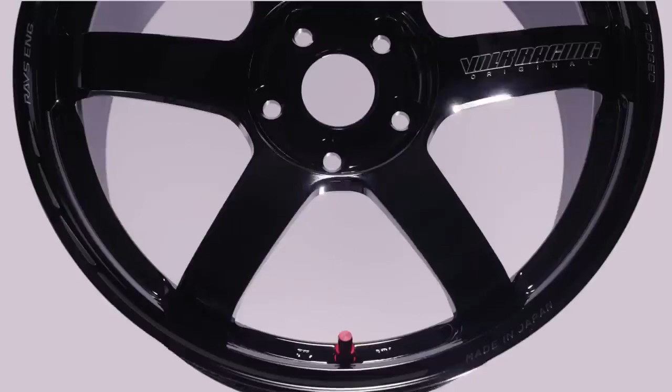World-class Rays forged wheels. The culmination of Rays Engineering's advanced technology and expertise. Taking advantage of the strength and lightness obtainable through forging. Original manufacturing methods and select materials lead to the pinnacle of forged wheels. Combining materials and technology to create the ultimate in aluminum wheels. Let's see how these forged wheels are made.

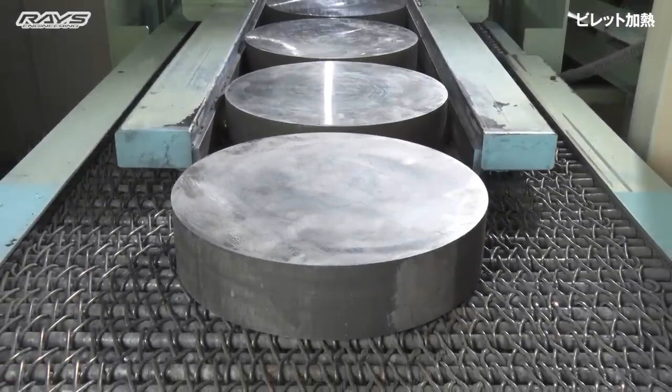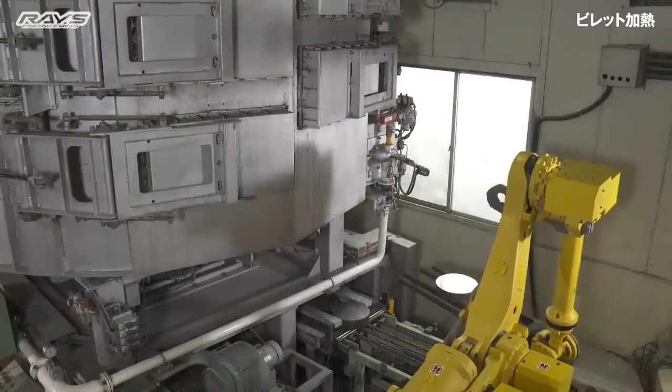The manufacture of forged wheels begins with the selection of the best possible material. Based on the aluminum 6061 alloy, these billets are comprised of our original premium blend aluminum alloy, developed with an emphasis on strength. Prior to forging, the billets are first heated to over 500 degrees Celsius to enable the material to be shaped into various innovative designs.

Using the heated billet material, we finally move on to the modeling forging process. TE37 Saga wheels are shaped using mold form forging dies in 3 stages. In the first forging, the billet material is made into a pancake shape with a diameter close to that of the finished wheel. The forging press applies several thousand tons of pressure, approximately 5 tons per square centimeter.

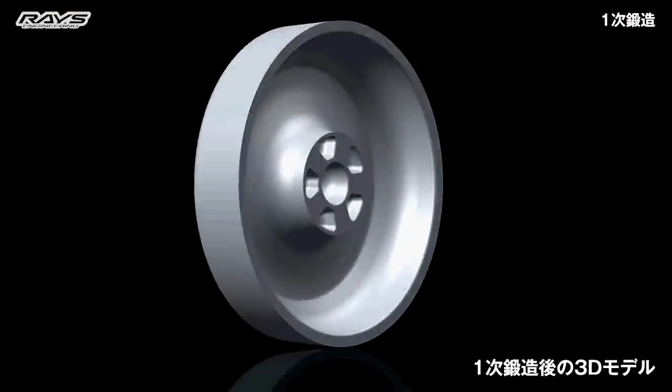From the second forging, a step-by-step mold forging from the pancake shape is performed. To achieve lightweight spokes, the cross-sectional shape is formed by forging from the backside. As you can see from the 3D model, the center of the spokes is hollowed out.

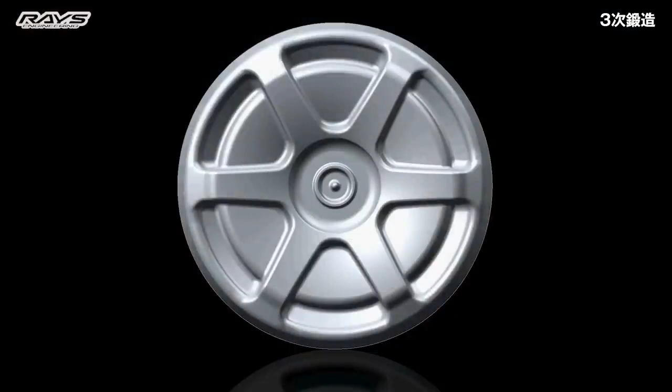Next is the third and final stage of shape forging. Together with the wheel design's overall shape, the hollowed-out portions formed in the second forging are transformed into U-shaped cross-sections, characteristic of thin-walled forging. Lightweight is the aim of this final stage, and a seamless grain flow is achieved through this unique die forging method to obtain the desired design, strength, and rigidity.

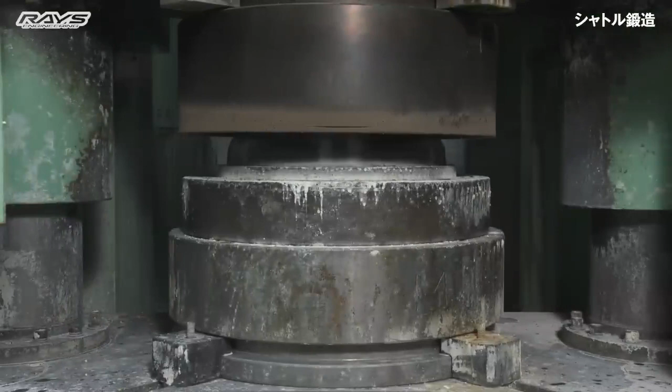This die forging method employs Rays Engineering's proprietary shuttle-type die forging system. Rays Engineering developed a shuttle forging press machine that slides the forging die sets from 3 directions to perform the first, second, and third forgings. This forging press can apply a forging pressure of up to 10,000 tons.

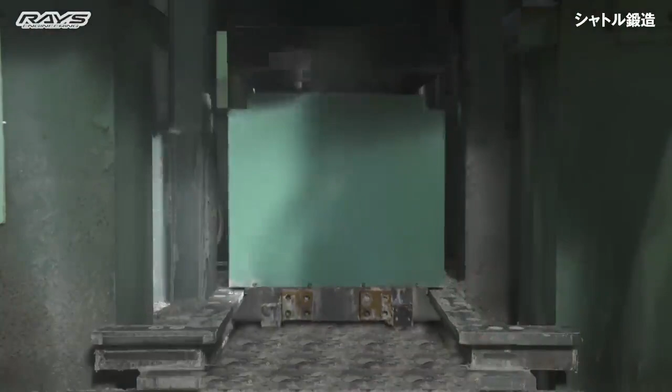The key to maximizing forging performance is the forging die's design. In the 3-stage forging used to transform the billet material into a wheel shape, the wheel's design side and reverse side are integrally shaped by 3-dimensional shaping using the die forging method to form high-strength, high-rigidity, U-shaped cross-sections for the spokes. Rays Engineering's designers combine expertise, creativity, and a thorough understanding of the materials and manufacturing equipment with leading-edge forging technology.

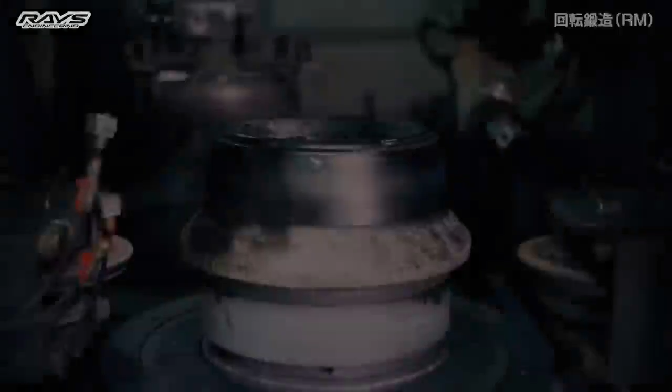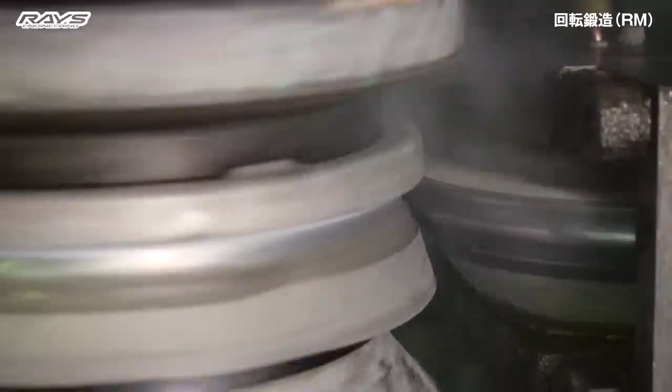This RM forging machine is also our original technology. In addition to forming the final detailed shape, it uses proprietary dies to simultaneously form the outer rim and the flaring of the inner rim. Similar to the mold form forging process, the material is heated, and the heated wheel is rotated as the roller flares the inner rim.

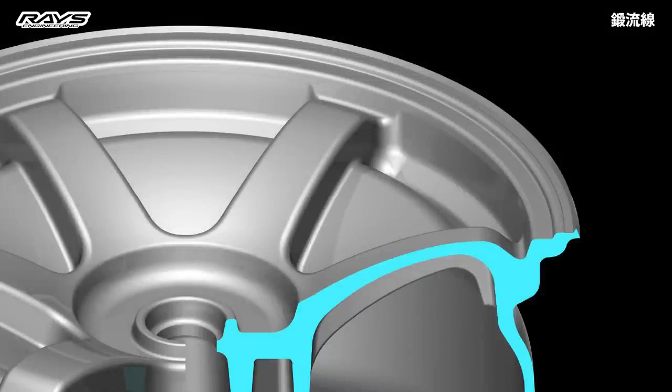When metal is heated and compressed, such as in forging, fiber-like lines called grain flow appear. No machining is used to form Rays wheels, only the mold form forging made possible with our unique die forging method, guided by the experience and knowledge of our design engineers. As a result, the grain flow lines fan out from the center of the wheel in a distinctive pattern, like the fibers of bamboo.

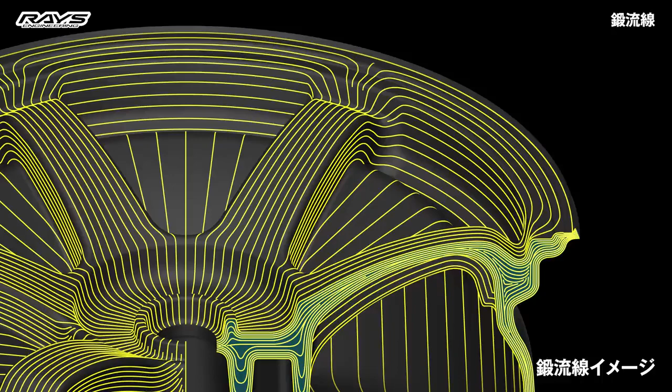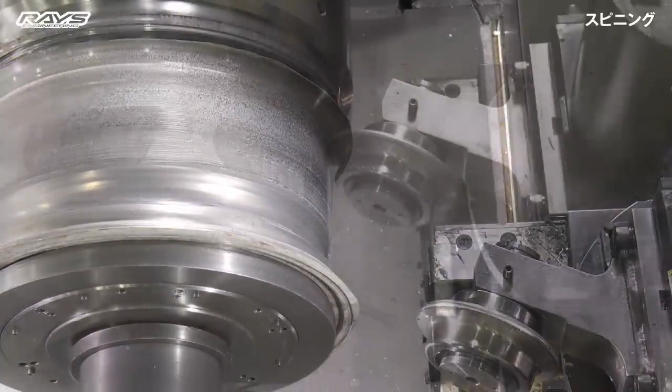This spinning process forms the inner rim's final shape. Inner rim molding from 5J to 13J is possible with a flexible mold, by taking advantage of the elongation characteristic of the uniquely compounded aluminum alloy.

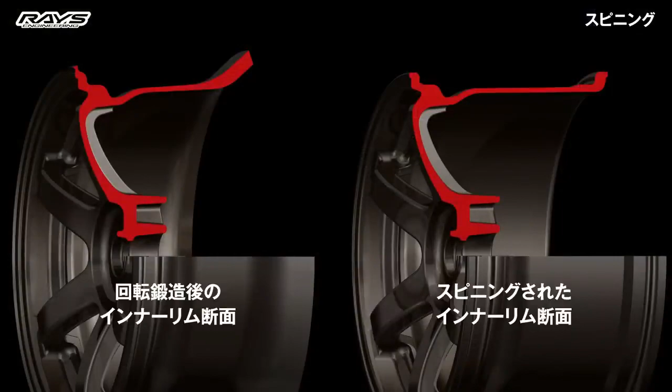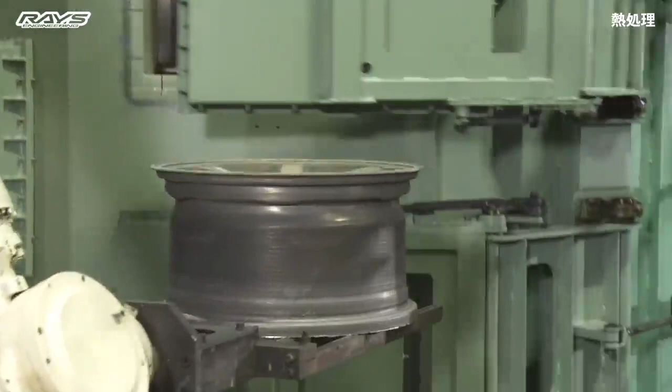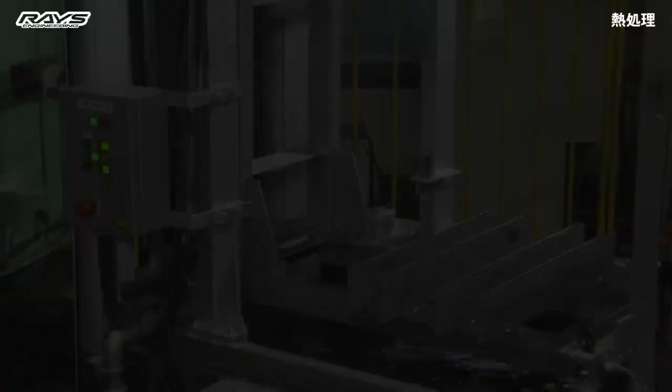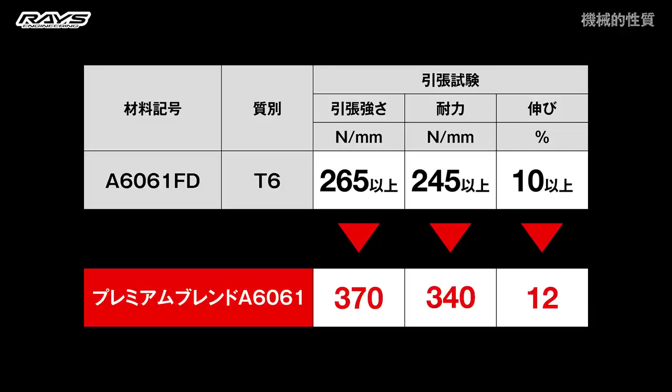Following forging and rim forming, the aluminum alloy is heat treated in order to maximize its unique properties. The heat treatment process consists of quenching and tempering. This heat treatment process is precision controlled to maximize the aluminum alloy's three key mechanical properties of tensile strength, proof stress, and elongation. As a result, even with a lightweight, thin-walled rim, good steering stability and suspension stiffness are maintained during cornering.

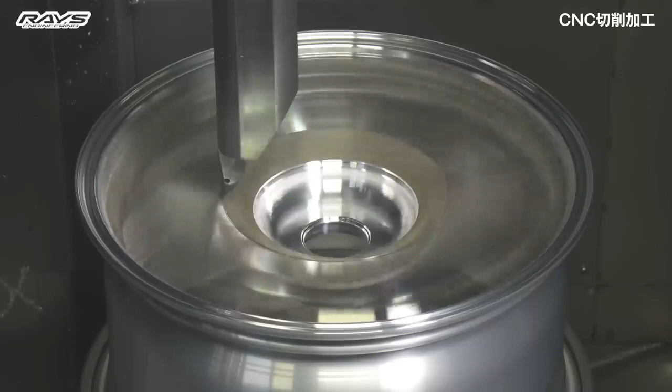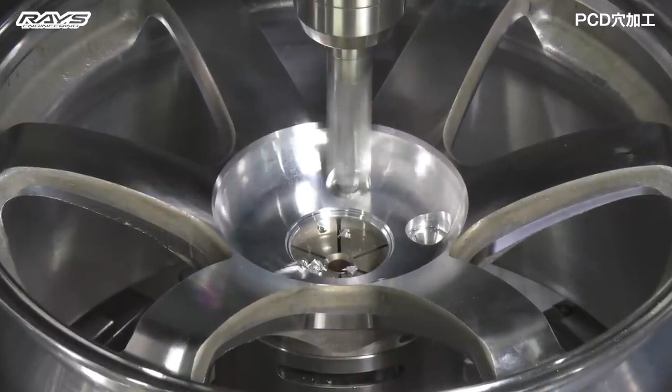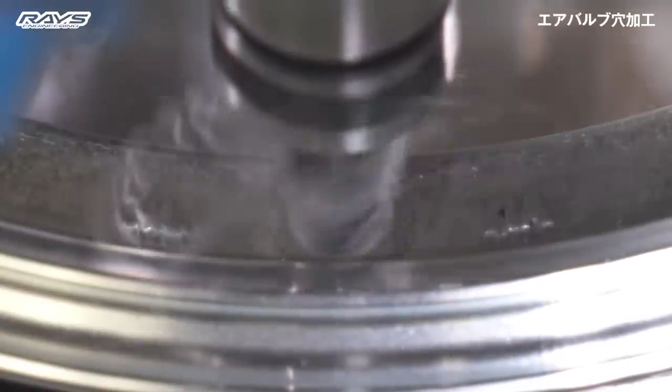The material of the forged wheel, which has undergone heat treatment, undergoes machining processing in advance of the tire inflation and vehicle attachment processes. In two processes, both the outside and inside of the wheel are machined to achieve a precise balance within 1/1000th of a millimeter, an essential factor. PCD drilling is another process that requires high precision, since the balance of the wheel's mounting points on the vehicle is a critical factor. The air valve hole is also drilled parallel to the well angle of the wheel.

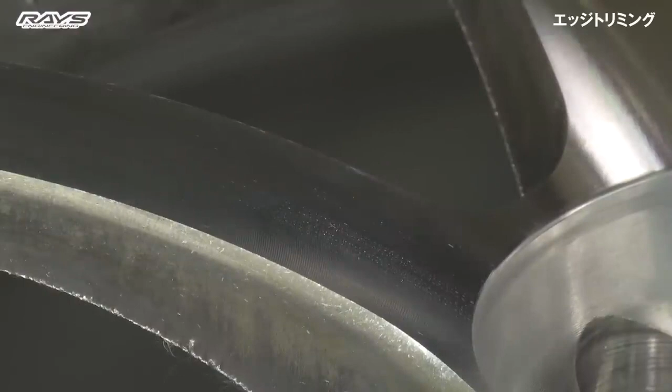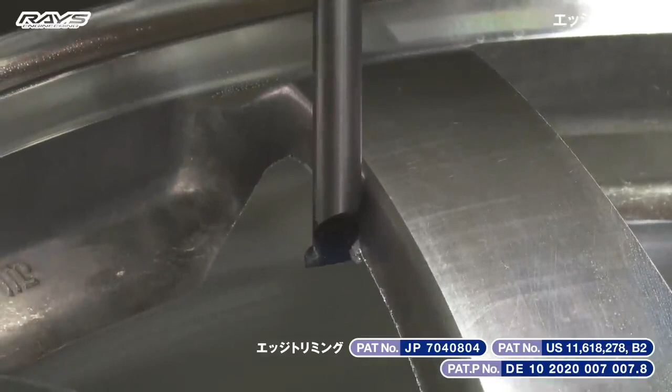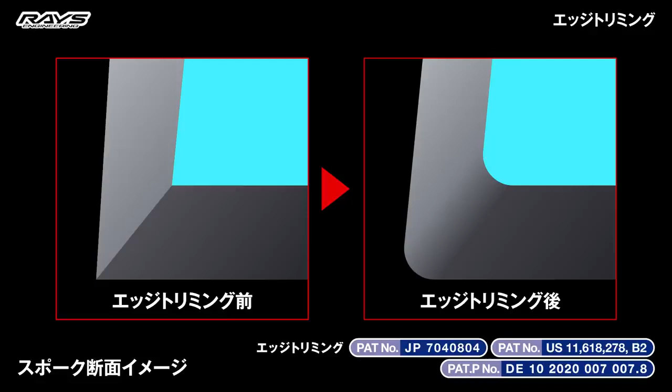Burrs remaining from machining on the spoke edges can reduce corrosion resistance after painting. To prevent this, Rays Engineering developed a method using a special tool that rounds the spoke edges on the rear side of the wheel during the machining process. This edge trimming ensures better adhesion of the coating film that's formed in the painting process, improving corrosion resistance for the wheels, which are subjected to corrosive conditions due to their proximity to the road surface. This edge trimming method is a patented Rays Engineering technology.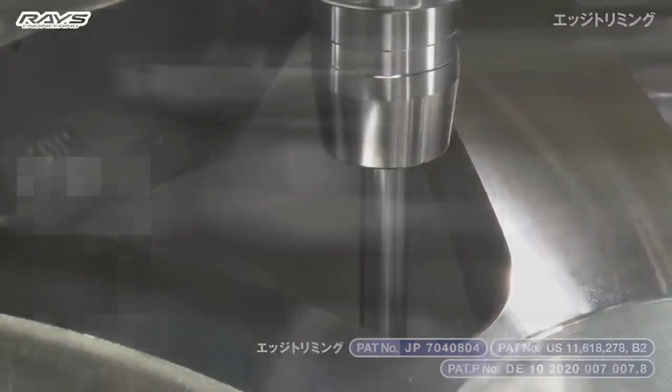Knurling is a process that improves wheel performance on race cars and other high horsepower vehicles. It helps prevent slipping between the tire and the wheel that might occur due to repeated sudden acceleration and deceleration.

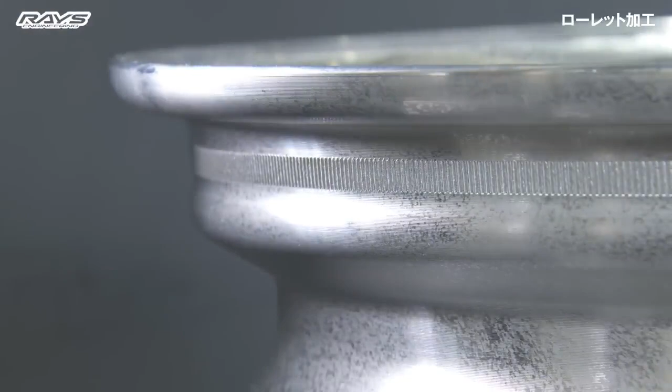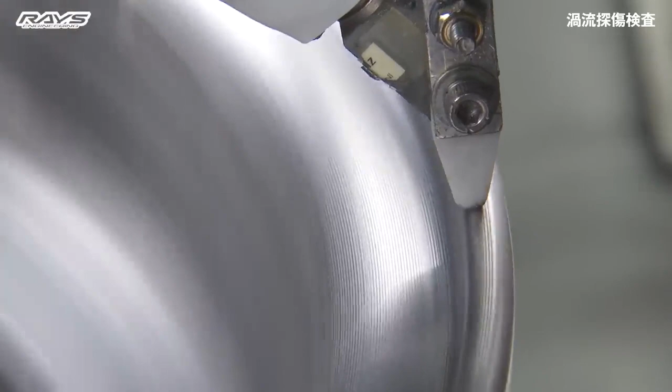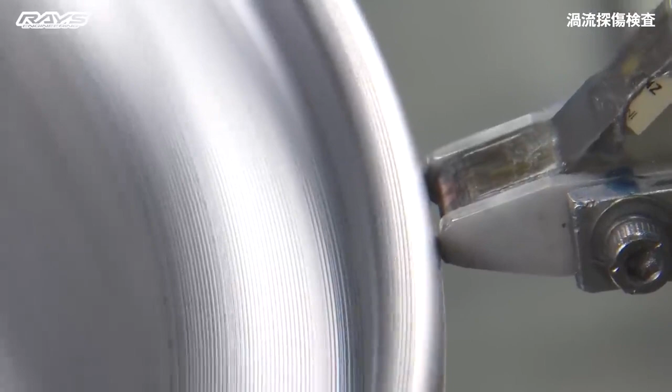Eddy current testing is used to inspect for hairline cracks invisible to the naked eye. In particular, the camber force that is repeatedly exerted on the inner rim edges during driving can cause cracks to appear in the rim if there are any internal defects, leading to a loss of driving performance that could potentially pose a serious risk. Considering possible worst-case scenarios, each wheel is methodically inspected for defects.

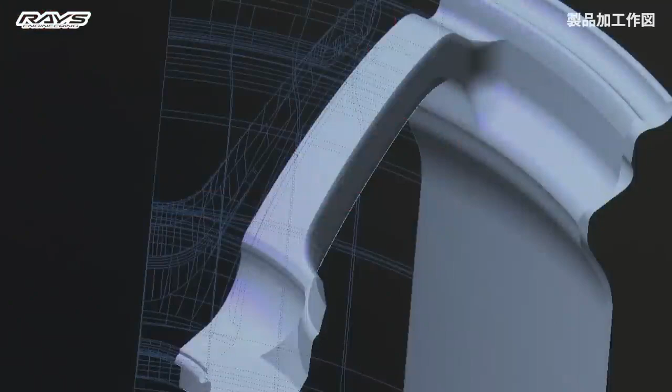Wheel strength, rigidity, and balance are essential to ensure safe, comfortable driving. All three factors are numerically verified right from the design stage. Here as well, our designers' knowledge and experience are a solid foundation for design plans to create ideal wheels that are strong, lightweight, and beautiful. Proven designs are the basis for Rays Engineering's wheel manufacturing.

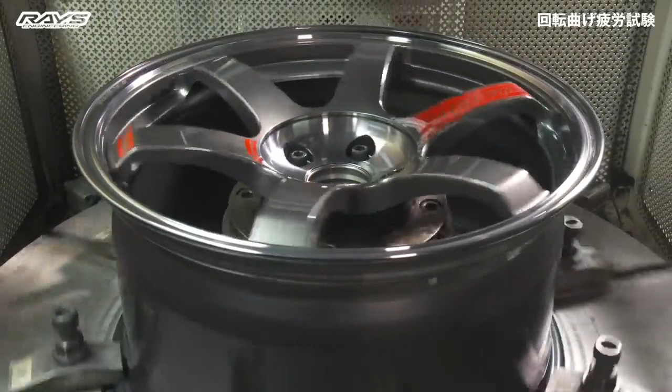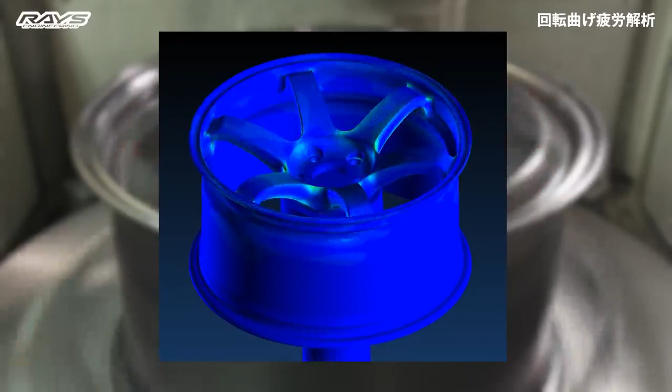Rotary bending fatigue tests evaluate disc fatigue durability. The Japanese government's JWL standard requires 100,000 rotations, but Rays Engineering has set its own +R standard of 200,000 rotations. This ensures sufficient performance to withstand the lateral G-force during cornering in severe driving conditions. Simulations at the design stage enable predictive design to guarantee the required lower limit.

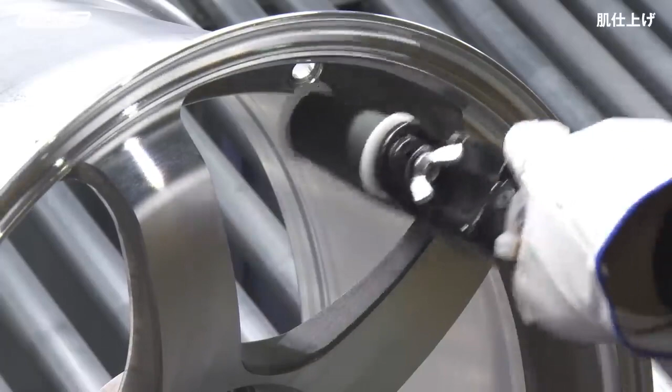Now let's look at the appearance-related processes. In the final stage of manufacture, the wheel surfaces are carefully polished by hand to remove the lubricant applied during mold form forging, as well as galling marks from hot forging, so as to ensure a beautiful finish for subsequent decorative painting. This work relies on the skill of Rays Engineering's dedicated staff.

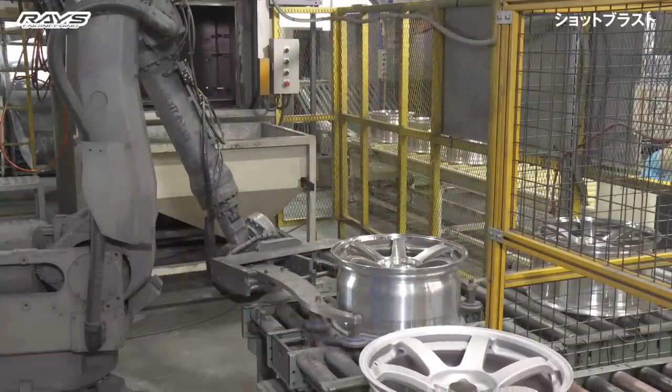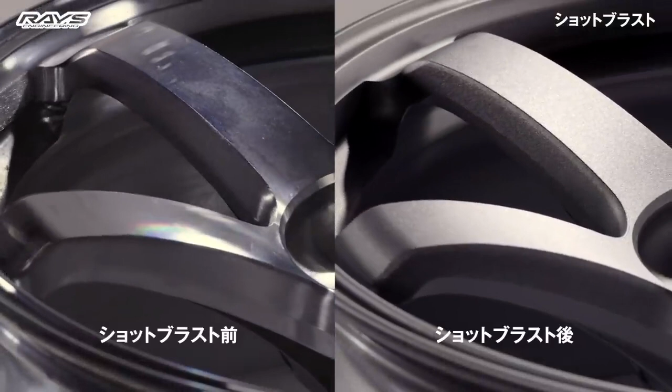Shot blasting has two purposes. First is to increase strength. While the forging, heat treatment, and machining processes already ensure ample strength, shot blasting is performed using stainless steel beads to make the wheels even stronger. Second is to level the forged surfaces. Painting the forged surfaces as is would not achieve the desired beautiful appearance.

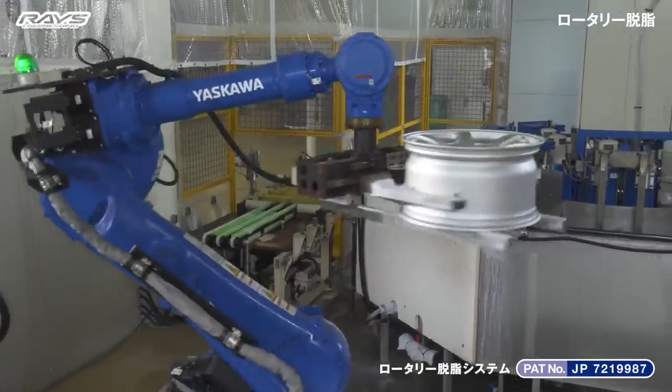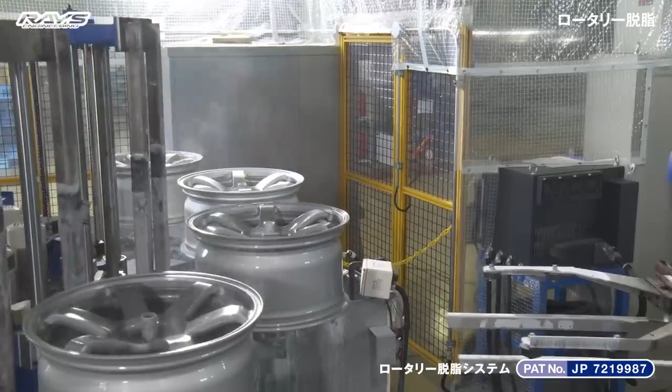Wheel surfaces are degreased prior to the powder coating undercoat. There are three processes: alkaline etching, acid pickling, and chemical conversion coating. A chemical conversion coating is formed on all wheel surfaces to ensure good adhesion of the paint and enhance corrosion resistance. The rotary degreasing system seen here uses a dipping method patented by Rays Engineering that ensures a uniform chemical conversion coating.

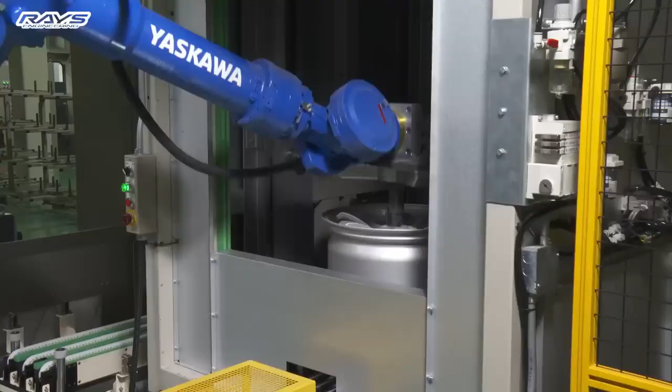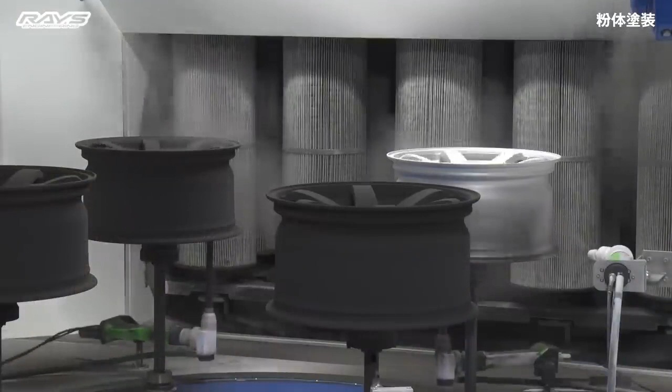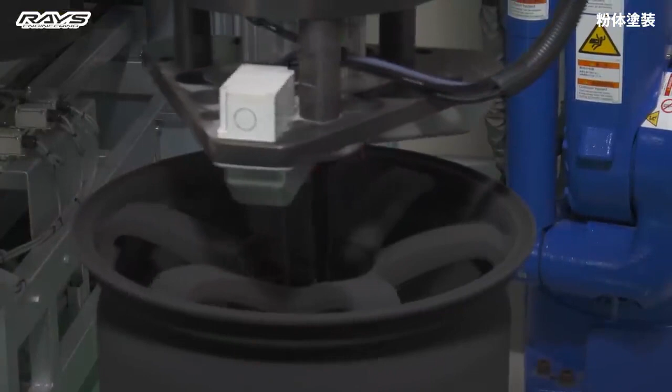The powder coating undercoat is then applied to the degreased wheel. The advantage of this powder coating is that its thickness enhances anti-corrosion performance. It also serves to level any unevenness of the forged surfaces. After the undercoating, a variety of solvent coatings can be applied, depending on the desired specifications for each wheel.

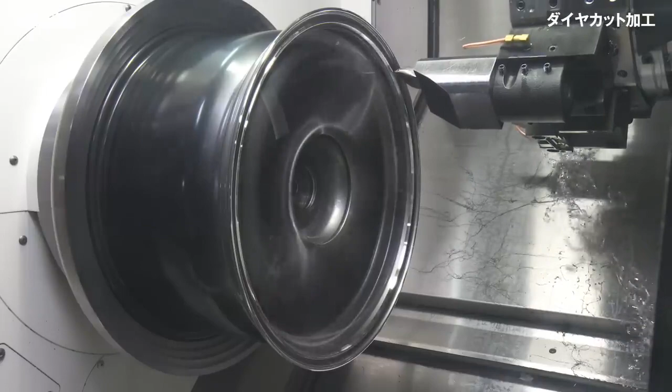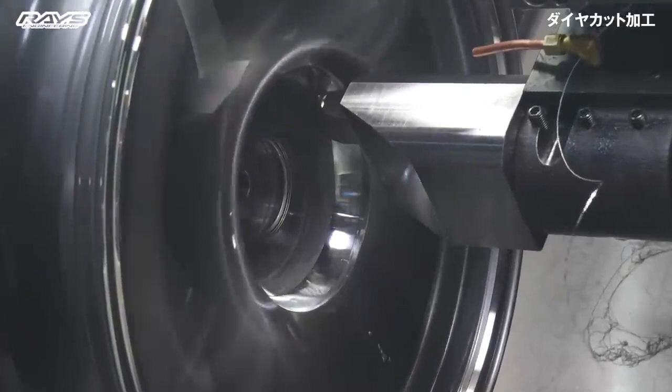According to the design specifications, diamond cutting is performed after painting for a lustrous shine. Our original aluminum alloy material is characterized by its lustrous shine. Designs that bring out that luster are achieved using diamond tips. This is essential for deep rim specification wheels that have a deep outer rim.

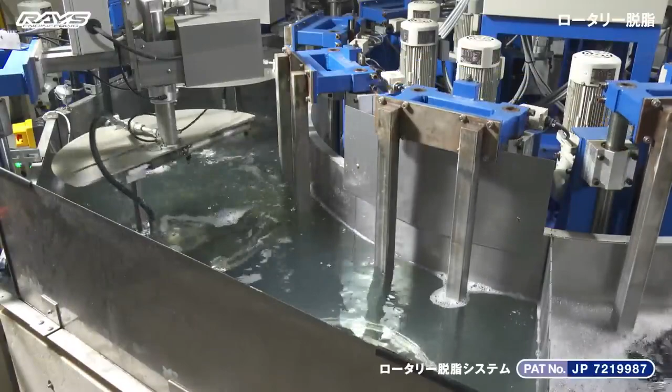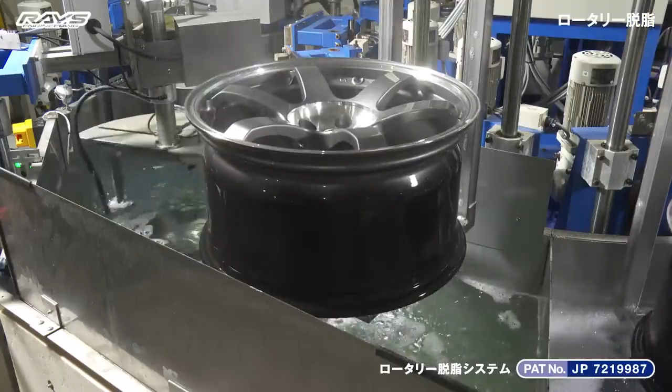To maintain the anti-corrosion performance of the diamond cut surfaces, diamond cut wheels are treated using the rotary degreasing system seen earlier. This entails the same three processes: alkaline etching, acid pickling, and chemical conversion coating. Again, the Rays Engineering patented dipping method ensures a uniform chemical conversion coating.

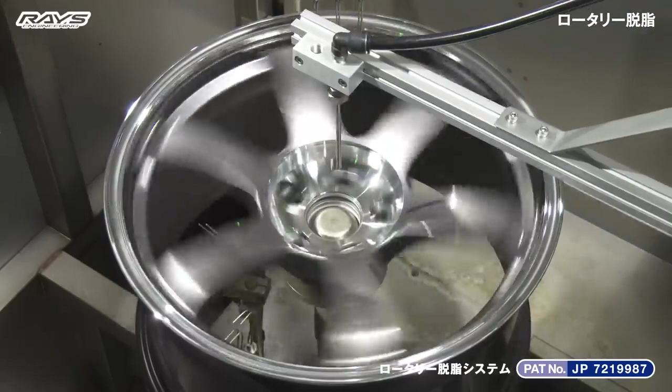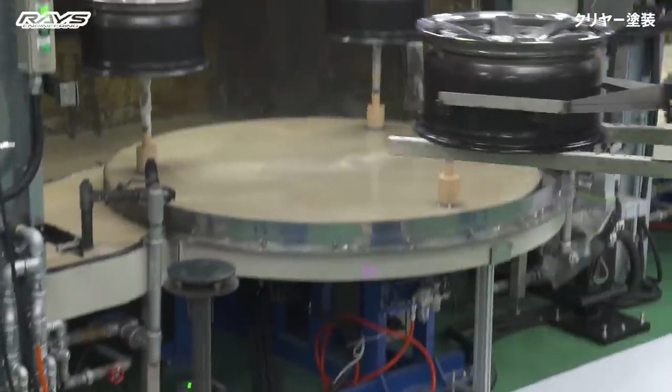A clear coat needs to be applied to the diamond cut wheels as soon as possible after degreasing. So, after air blow drying, the wheels are sent to the painting booth area. Rays Engineering's factory automation line system prioritizes anti-corrosion performance. After degreasing, the wheels are transferred by robot or PLC-controlled lines to the solvent coating booth area.

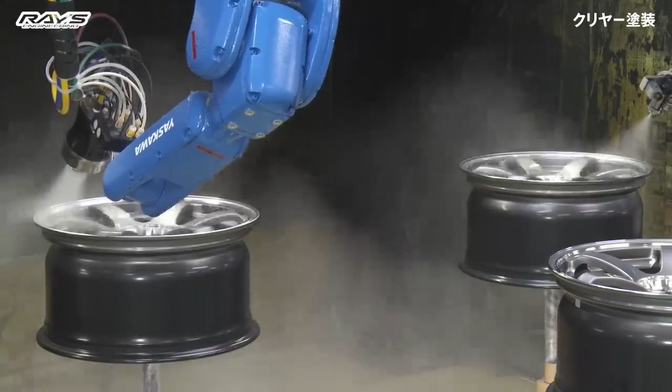The clear coat is applied in 2 stages. First primer, then the clear coat. A variety of transparent and colored clear coats are available to meet specific needs.

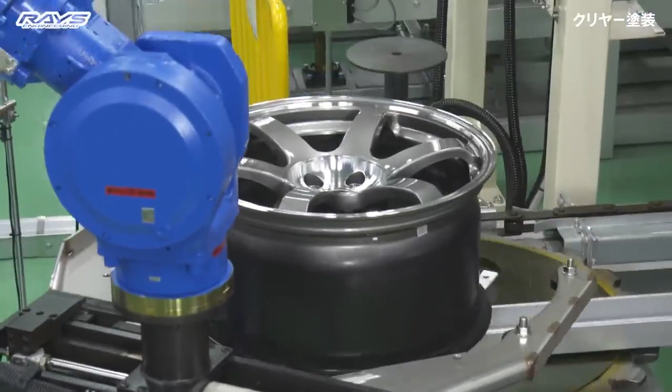The most prominent feature of AMT, Rays advanced machining technology, is the ability to engrave markings on wheels after a coating has been applied. With AMT, the grooves cut by the machining tool are left as is. This enables letters and other delicate markings to be engraved as continuous lines. No matter how difficult the engraving, our proprietary machining center achieves a production speed and quality rivaling mass-produced products.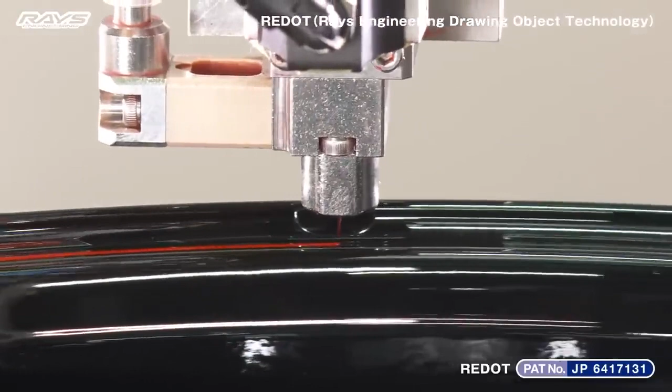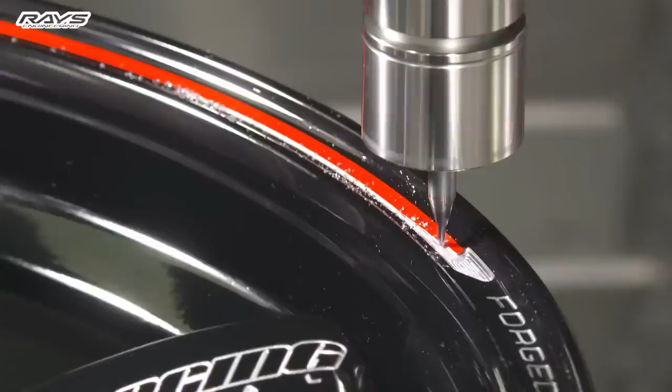With REDOT, Rays Engineering Drawing Object Technology, a bubble jet spray system is used to apply a second coating of solvent onto the wheel design face as an accent color after the first color has been applied. Employing application devices with coating supply heads that make possible the application of colors and decorative designs, Rays A.M.T and REDOT are leading-edge technologies that achieve mechanical designs never before possible to reach new heights in wheel design.

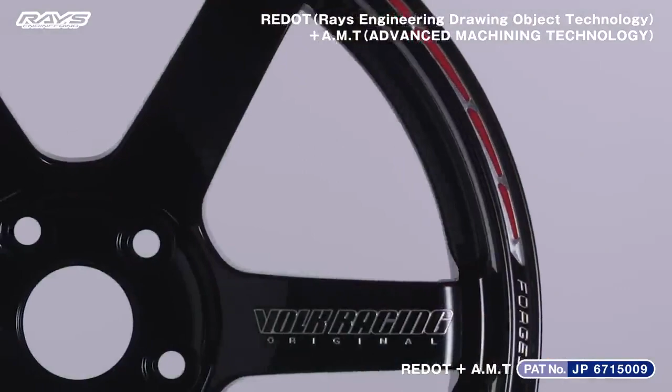As you've seen, most forged wheel manufacturing processes are performed by machines. But the final inspection requires human eyes and hands. Inspectors apply all of their considerable knowledge and expertise. As the final inspection is the closest step to the end user, it can only be performed by expert craftsmen with years of experience.

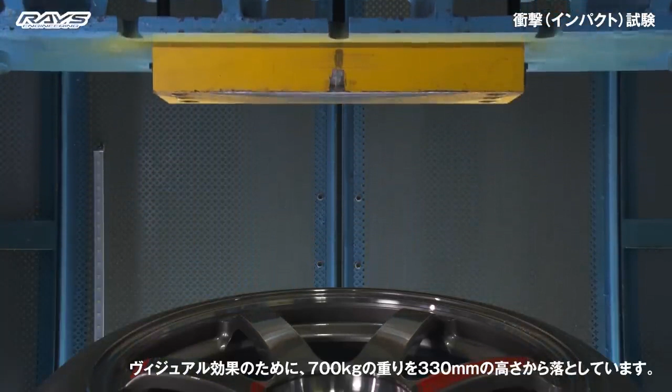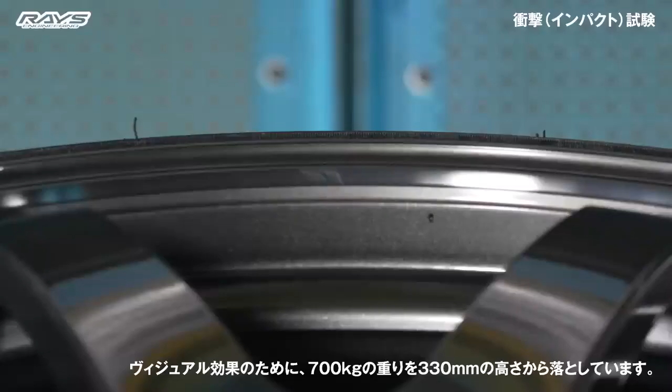Before finished wheels are released onto the market, they undergo a battery of durability tests. Here, the rim disc's strength and its ability to hold the tire's air after a hard impact are assessed. In the JWL standard impact test, a weight of 500 to 600 kilograms is dropped from a height of 230 millimeters to assess impact resistance.

But that's not enough for Rays Engineering. The +R standard from a height of 305 millimeters is used to assess the impact force exerted on the wheel, such as when driving over a curbstone or a speed bump. Die forging gives Rays wheels the resilience to withstand such impacts, and is verified in simulations from the design stage.

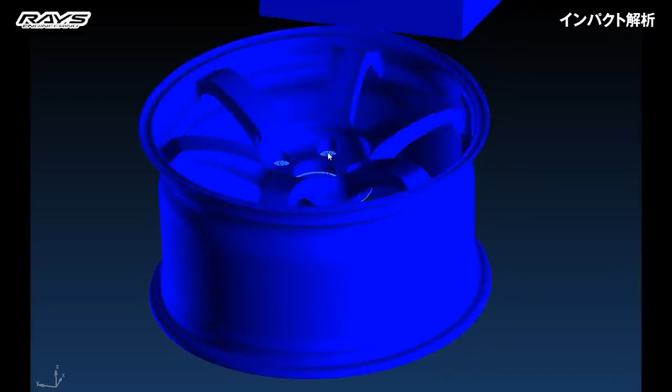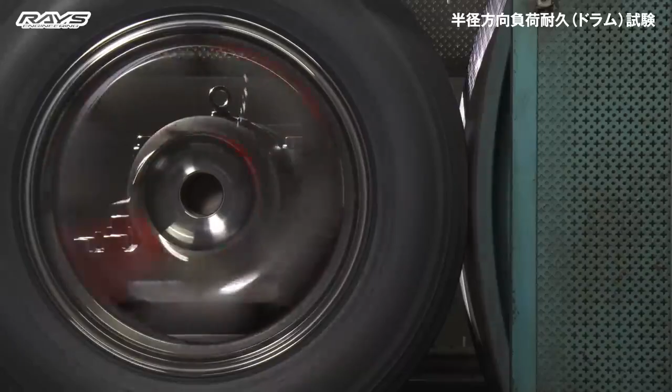Wheel durability is assessed using drum endurance tests. The JWL standard requires 500,000 rotations, but Rays Engineering has set its own +R standard of 1 million rotations to ensure that wheels can withstand vertical loads exerted by continuous driving in severe conditions. Rays wheels can meet this high standard because the forged material has a high fatigue strength and the wheel's composition is uniform, so the strength is also uniform.

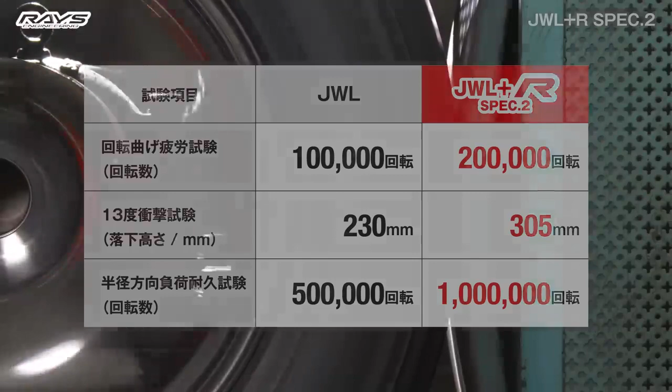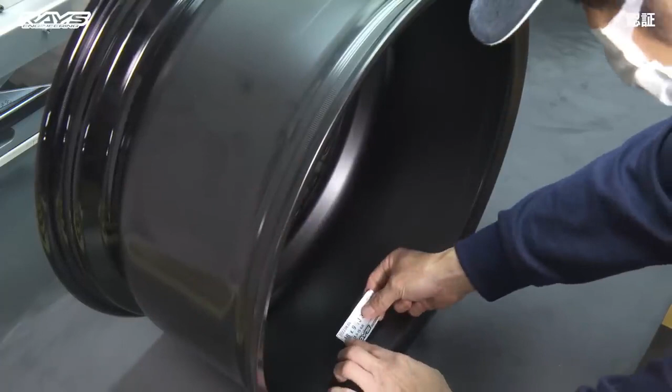Certification stickers are applied to wheels that satisfy the +R standard. These stickers are proof of having passed the most rigorous testing. Rays Engineering's original forged wheels. Thanks to unique wheel designs that meet global demand and the advanced proprietary technologies used to manufacture them, Rays Engineering continues to be a leader in the field. Taking forged wheels to impressive new heights, Rays Engineering.